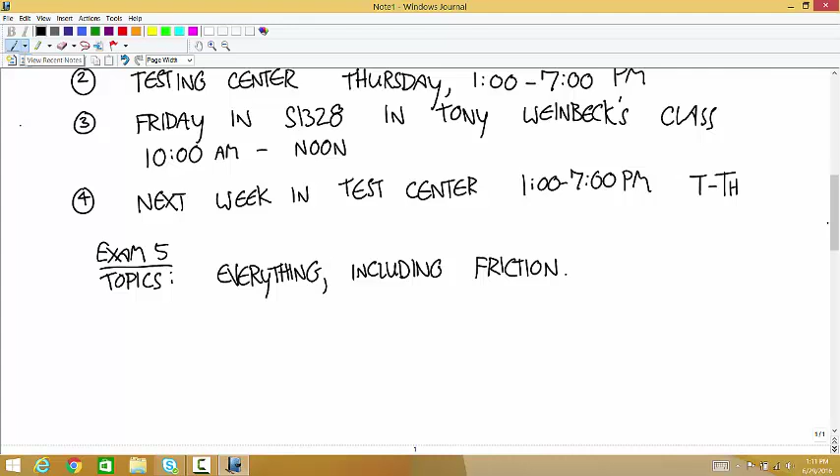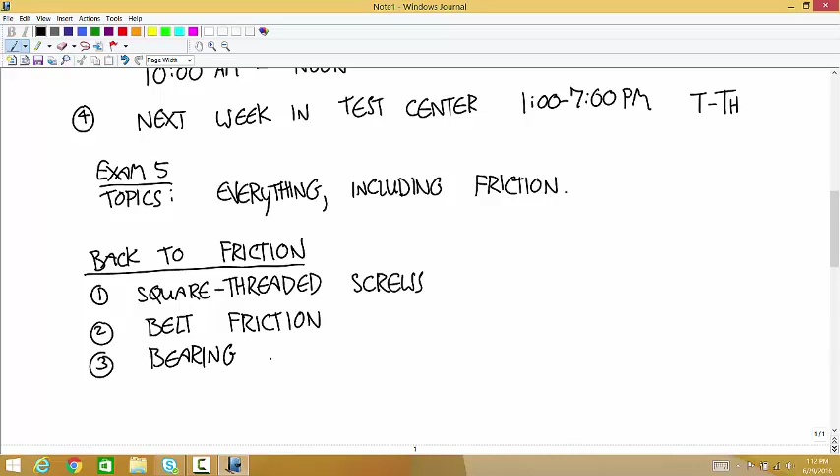Okay, so last time we talked about square threaded screws. So going back to friction, the topics are square threaded screws, belt friction, and bearing friction. And bearing friction is broken up into journal bearings and thrust bearings.

We're done with this one, so the next one is belt friction. Okay, so what's belt friction?

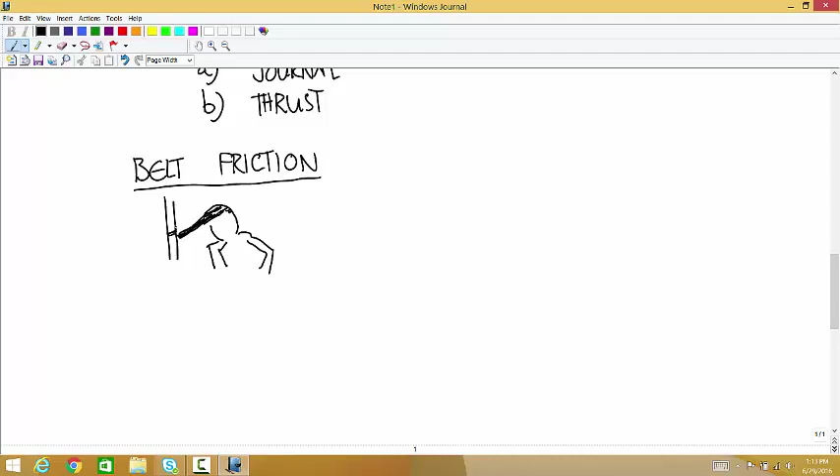You know how Rapunzel, when she's up in her tower... okay, here's Rapunzel, she's got really long hair. I don't know if you've heard of her before, but this prince wants to come up and play Nintendo or whatever. So she sends her hair down to let him come up, but obviously it would hurt a lot to just have someone hanging off your hair. He's not the thinnest guy. So she wraps her hair a whole bunch of times around this pole in her window and then drops it down, and then the prince can climb up. Okay, it still probably hurts.

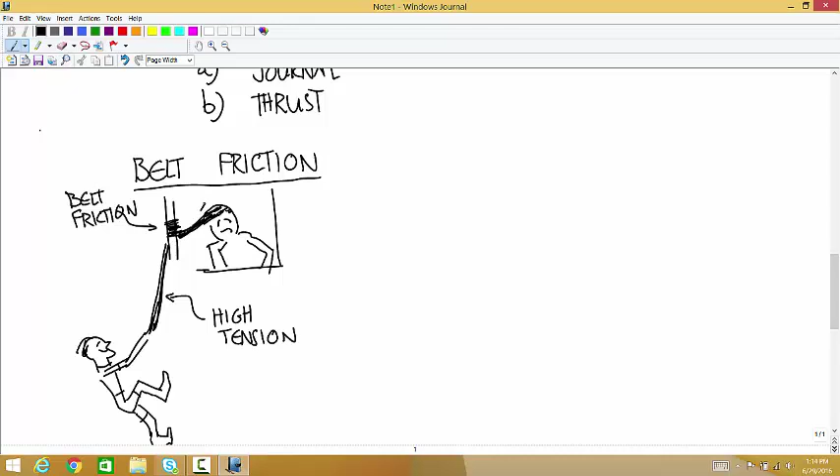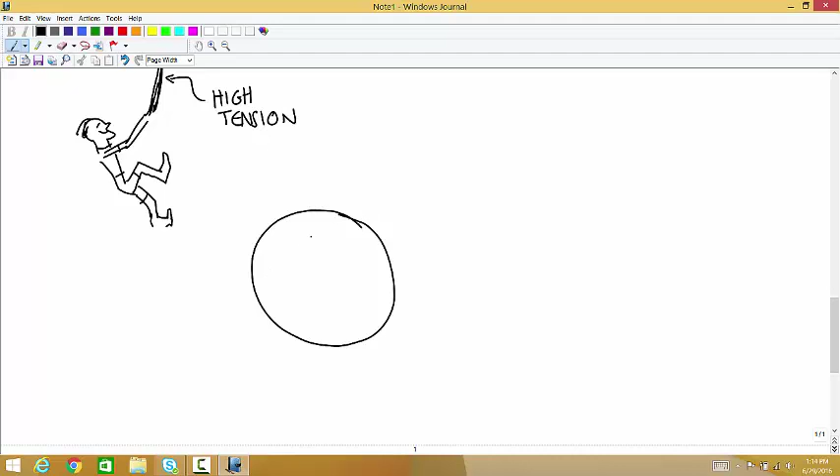Okay, so she's taking advantage of belt friction. If you wrap a cable around an object, there's a different tension on the two sides of where it's wrapped. There's a high tension on this side and a low tension on this side. And so for the calculation, we're always doing this with the cables wrapped around a circular object. So if this is the thing the belt or cable is wrapped around, here's one side of the cable, here's the other side of the cable. There's a T1 on one side and a T2 on the other side. We'll always assume this is the high tension, and this is the relatively lower tension.

And if you draw lines from the center of the object out to where the cables leave the object, you can think of the amount of wrapping that's being done as represented by this angle beta. This has to be in radians.

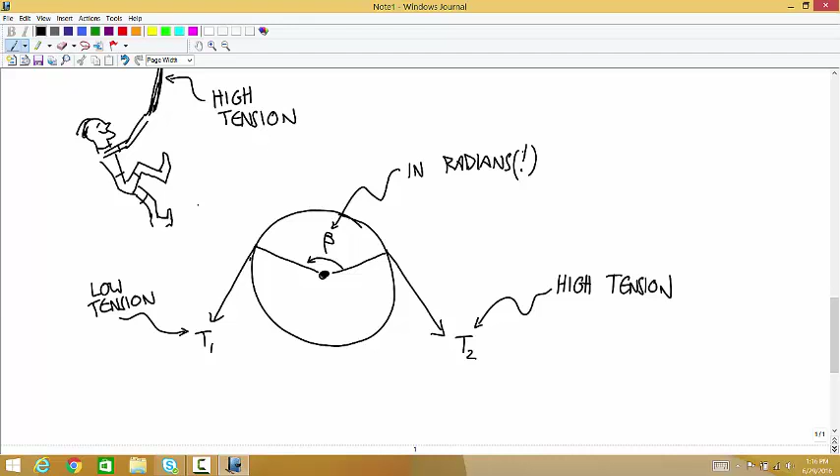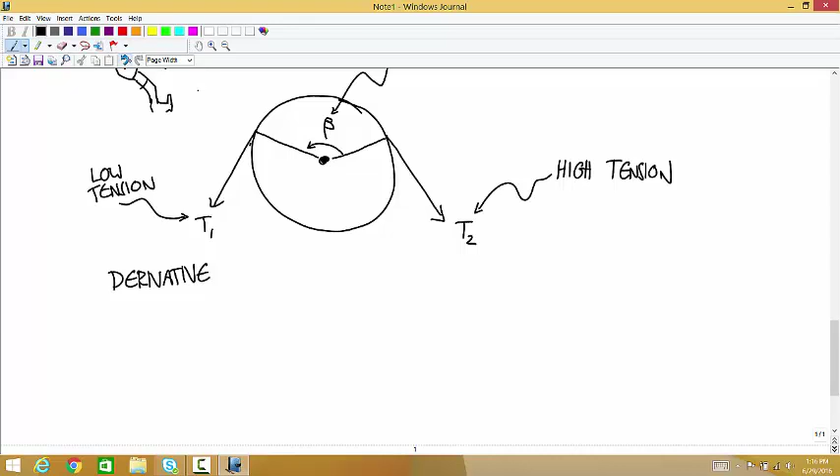I'm not going to go through the derivation, although it does follow a set of steps you see a lot in mechanics, but it's kind of tedious and takes a while. So I'm just going to try to show the thought process of the derivation. It uses the isolation of an infinitesimal piece of the cable.

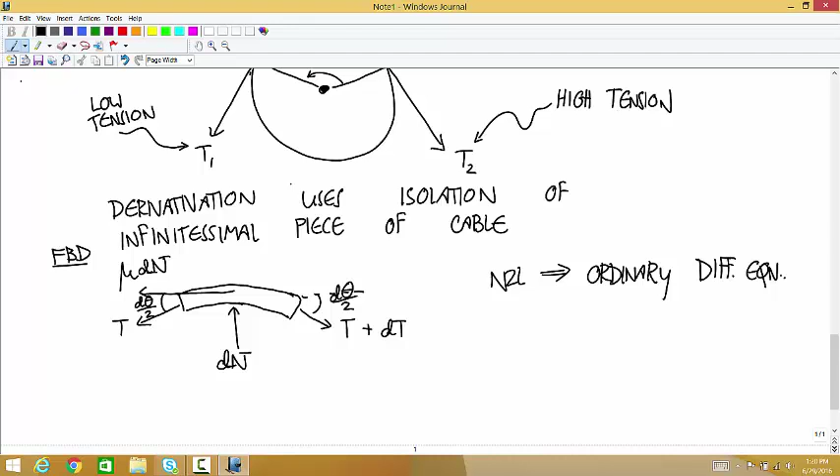And the solution to that ordinary differential equation is an exponential function. Any of you who've had classes where you talked about ordinary differential equations - exponentials are often a solution type. So it gives a solution that's an exponential, and that's not too surprising or unusual.

And so the final form is the ratio of T2 over T1 is equal to E to the power of the coefficient times that angle beta.

All right, so what are the ranges of possible values that this exponential can take? Well, what's the lower bound? It could not be wrapped at all, right, or touching at just a single point. In that case, what would beta be? Zero. And so you'd have e to the power of 0, which is 1. And that means that if that cable isn't wrapped at all over the object, T2 and T1 are the same.

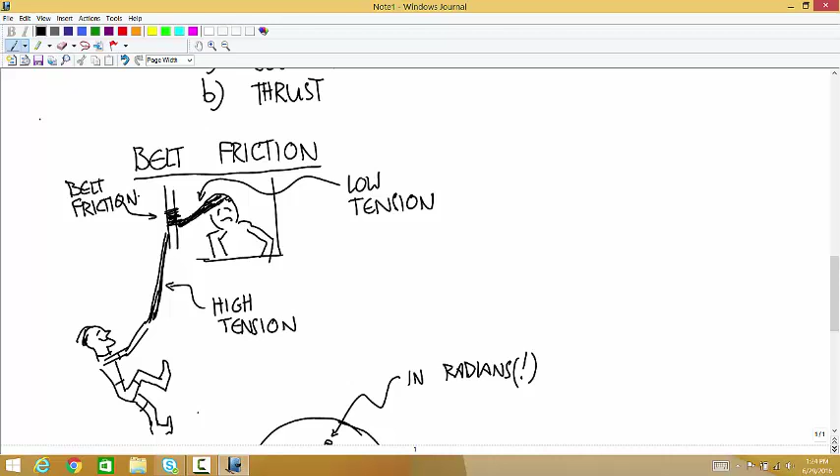Well, think about it as wrapping the cable around a pulley. What happens if you wrap this cable around a frictionless pulley 50 times? If there's a tension T on this side, what's the tension on the other side? It's T. It doesn't matter how many times you wrap it, because the pulley has no friction.

On the other hand, if this wasn't a pulley, if the belt was made of rubber and this was fixed so the pulley couldn't rotate, and rubber and metal have a high coefficient of friction, and you wrapped it around 50 times, and applied a tension T to this side, how much of that tension would be felt on the other side of the cable? Like none. That's the idea.

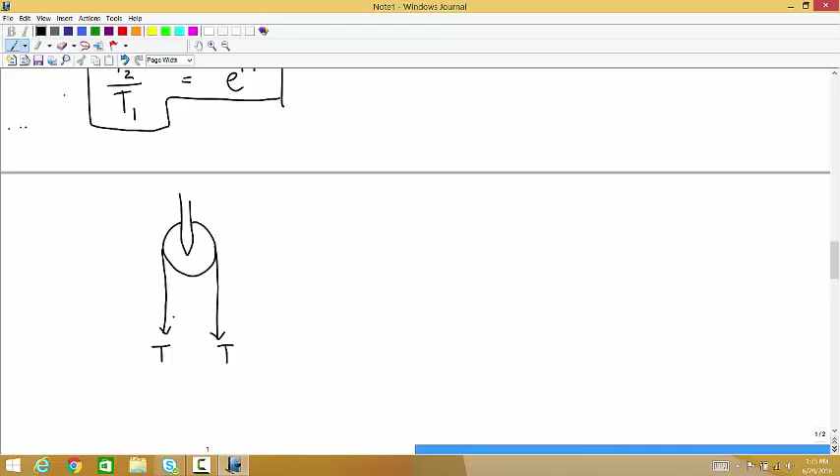Okay, so let's do an example. Any other questions?

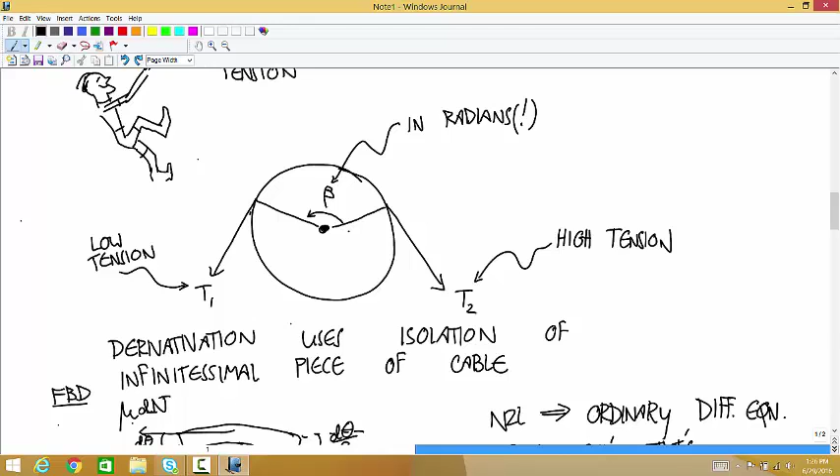According to the formula, beta has to be in radians, and it equals the number of times wrapped. In the drawing I did, it's not wrapped even once, so beta is just the angle between the two places where it leaves. But if it's wrapped a full time around, that's 2 pi. If wrapped a full time plus pi over 6, it's whatever that fraction adds up to. So if you wrapped it 3 full times, it wouldn't just be 0 — it would be 6 pi.

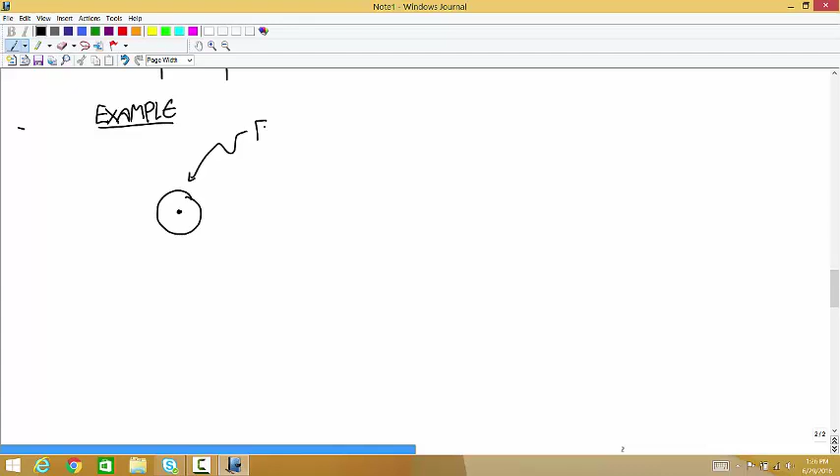Okay, so let's say this is the object. It's not a pulley, it's fixed — that's important, because if it were a pulley, none of this would have any effect. Let's say over here you have a 100 kilogram mass, and over here you're applying a force F. What F is required to maintain equilibrium if the cable just goes over the top and leaves on the other side?

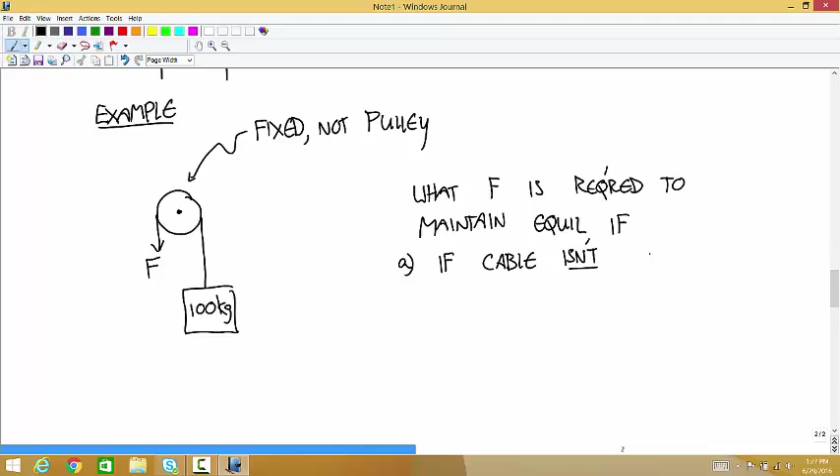So let's say the cable isn't wrapped multiple times. Second, what if the cable is wrapped 3 times before leaving the object in the configuration shown, before losing contact with the object?

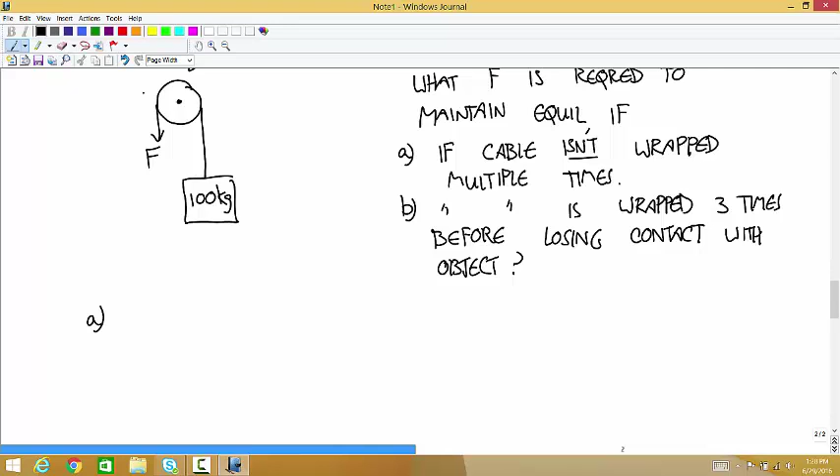Okay, so for part A, what would be the angle beta? Oh, and I need to give a coefficient of friction — let's say the coefficient of static friction is equal to 0.4.

So for part A, the cable is in contact starting at this point, all the way over the top until it gets to this point, and then it leaves. What's beta equal to? Pi. So T2 over T1 is equal to e to the power of 0.4 pi.

So we have T2 equal to 981 newtons. So 981 over T1 is equal to e to the 0.4 pi. So T1 is equal to 981 over e to the 0.4 pi. What do you get for that?

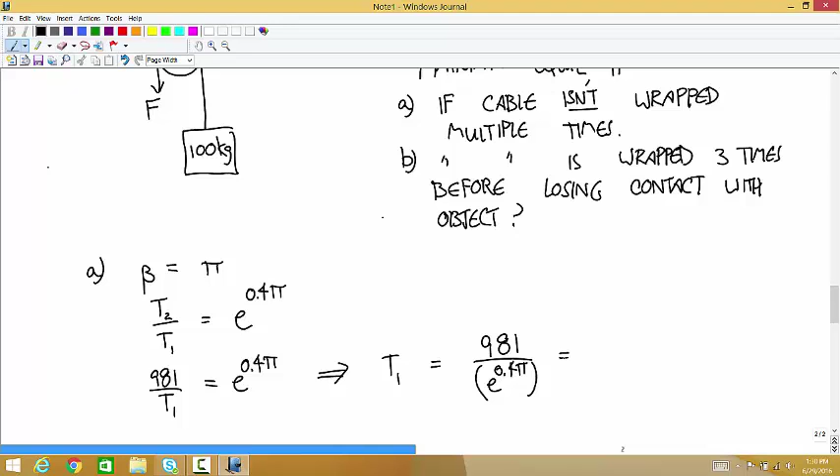I don't have that calculated — 0.4 is the coefficient of friction I gave. What is it? 279.2 newtons. Okay, so in order to support this 100 kilogram mass, it's a considerably smaller force you have to apply on the other side.

Now, what do we expect to happen if you wrap it 3 times around — is F going to get bigger or smaller? Smaller. What's beta equal to if you wrap it 3 times around and then it leaves? It's 6 pi for the 3 wraps, then you're back here, and 1 more pi to get over the other side. So beta is equal to 7 pi.

So 981 over T1 is equal to e to the power of 0.4 times 7 pi. So T1 is equal to 981 divided by e to the 2.8 pi. What do you get for that?

0.148 newtons. So it's tiny. Your question about whether there's a cutoff where there's basically no force—you'd probably say that we've already reached it by now.

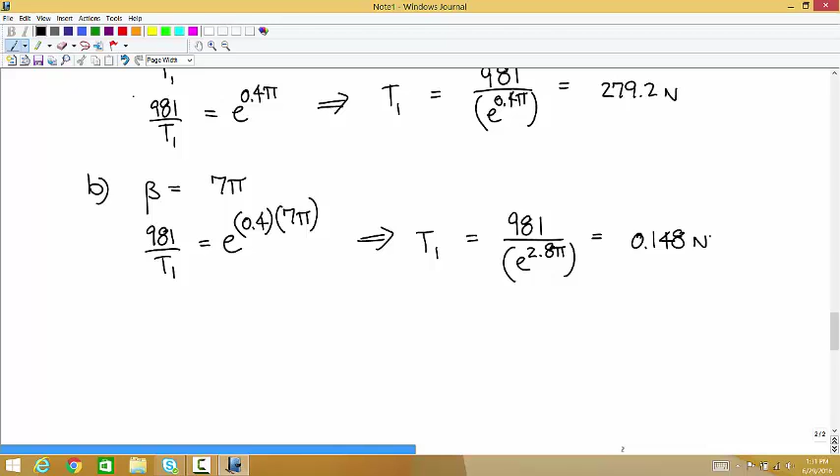Shouldn't it have a 6 pi instead of 7? It's because we went 2 pi, 4 pi, 6 pi, and then 1 more to get to the point where it leaves.

Question: why does T2 have to be the weight force rather than the other side's pulling force? Why does T2 have to be weight force?

T2 always has to be the bigger force. But how do you know F will always be smaller than the weight force? Well, there's always going to be one force that's required to keep it in equilibrium, and one that's a given force. In this case, the given force you're trying to keep in equilibrium comes from that 100 kilogram. You can think of this F as like a reaction force.

I have a quick question. Where did you get that 7 pi from? I understand if you go around the circle one time, you have 2 pi. Yep, so 3 times is 6 pi. And then, so where is that?

Okay, so 6 pi, this is where it touches the object, right? Then you go 6 pi, and you're back to this red dot. And then it's another 1 pi to get over here to where the cable leaves contact with the object.

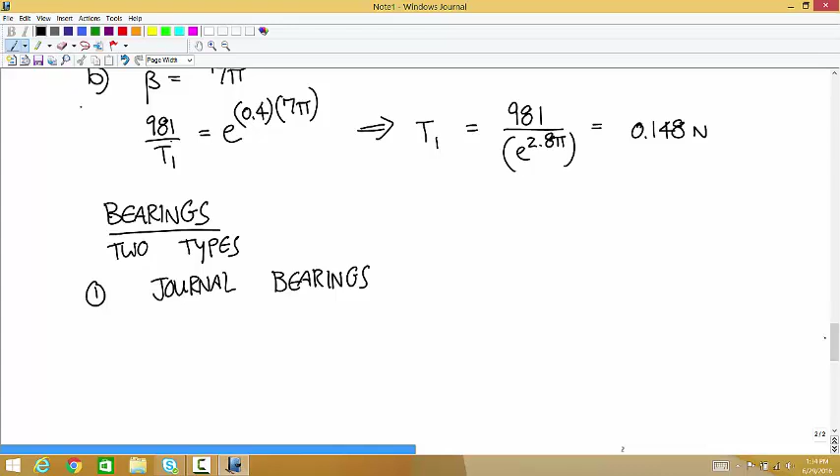Okay, so now bearings. There are 2 types that we're going to talk about. One is journal bearings. I think the easiest way to think about the difference between these two is what part of the joint, or what part of the two sides of the joint, are in contact with each other.

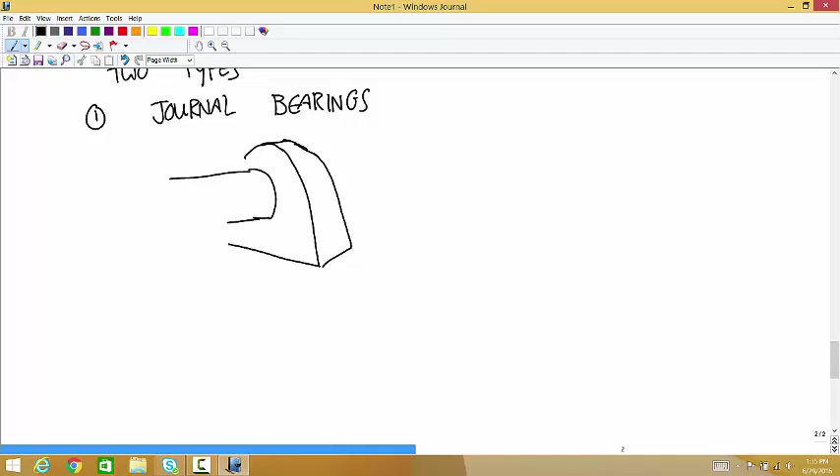A journal bearing is like the way I've been drawing pin joints. Okay, so if this object is rotating in this pin joint in this bearing, the surface that's in contact is like the underside of that pin in contact with the bottom of that hole. You see that? Somehow in my mind I thought I was going to be able to draw this more clearly than that.

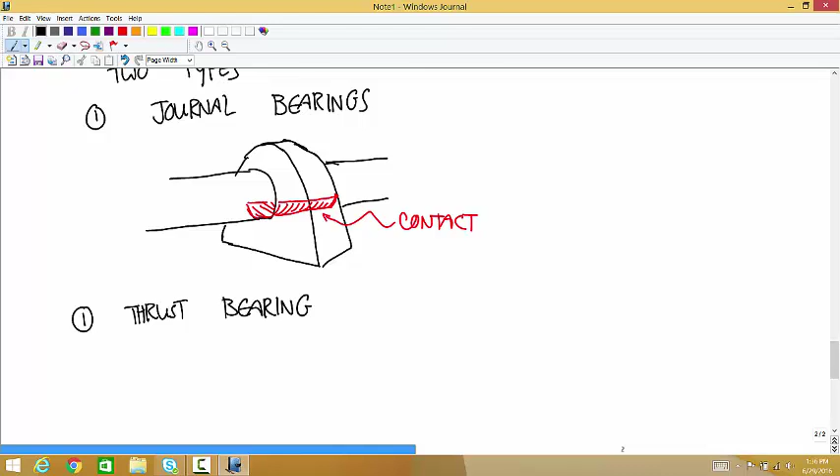Okay, so this is the place where it's in contact—that's a journal bearing. A thrust bearing is like you have this axle in contact with a wall or a floor or something, and the surface that's in contact is where the obscured side of that axle makes contact with the wall. It's called a thrust bearing, so this is the contact, because that friction comes from thrust applied this way.

Okay, so yes? This is like—it's like this, that's a thrust bearing, the friction rubbing like this. A journal bearing is like the friction in a motion like this. So it's kind of like when they connect shafts for drills or propellers—they're connected to another flat surface and then turning with thrust? That's right, yep, that's right. Like any kind of clutch. I assume that's like a clutch mechanism, right?

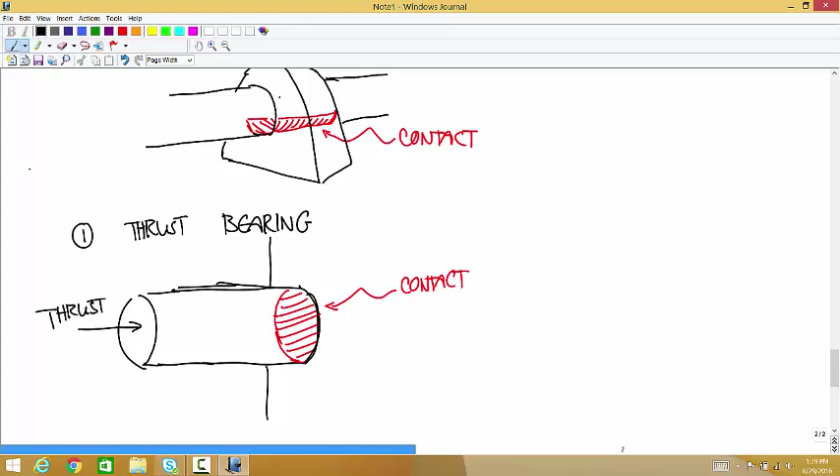And actually, that idea of going from a distributed load to a point where that force is applied is going to be key to understanding how this calculation works. It's a region, but you can always find a center of pressure—a point where that distributed load would act if it were a point that makes it an equipollent system. Yeah, right. Okay, so journal bearings.

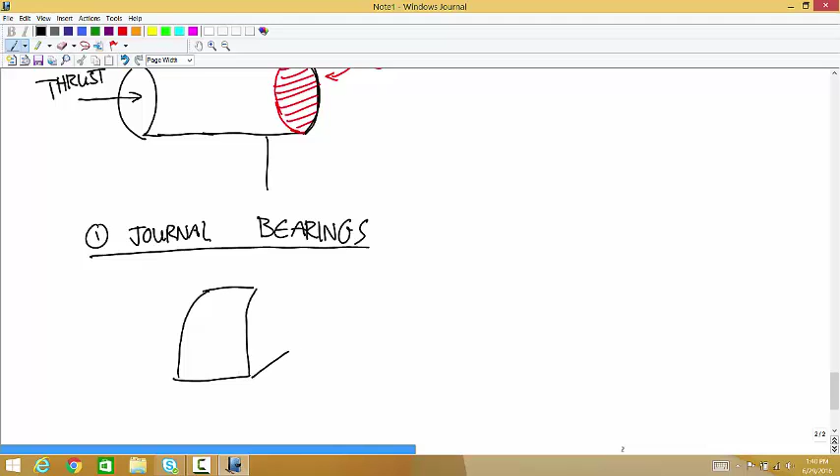So this is the bearing, and there's an axle extending on both sides. You can think of this as rotating this way. Let's say there's a weight applied to the axle, split over the two sides, so half of the weight is applied over here, and half over here. We'll think about observing it from the side.

And we're going to isolate the axle.

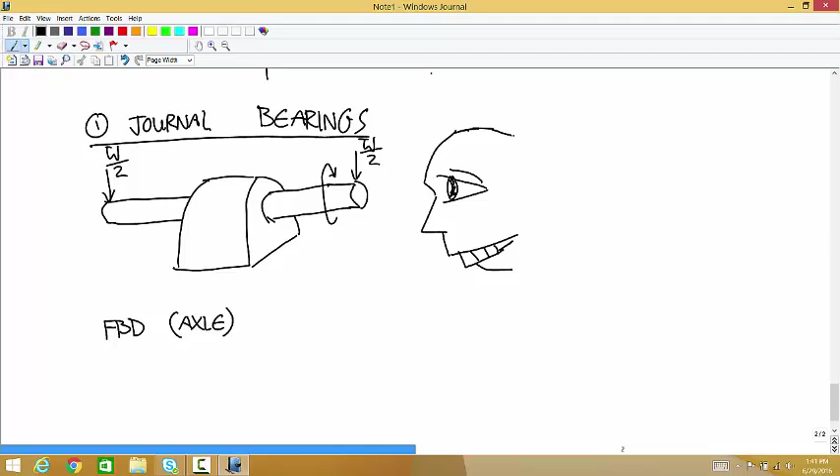Yeah. It's supposed to be like some dumb hillbilly hick. What's an axle? Like that. What's an axle? I took statics at Century. No, just kidding. All right.

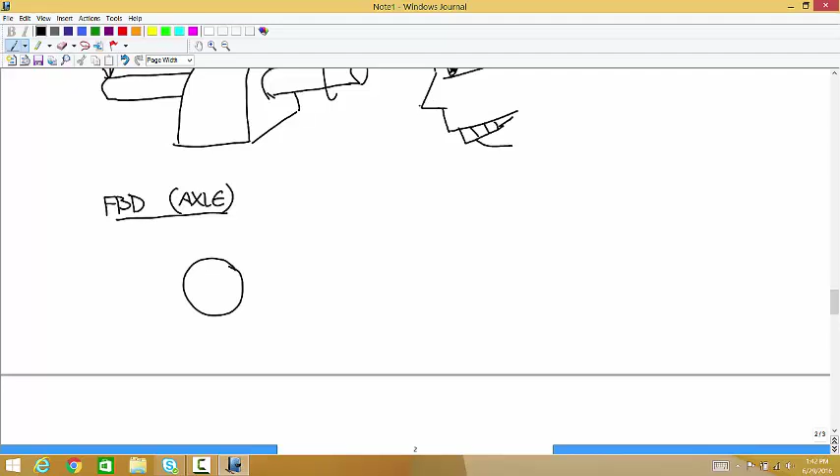So there's the axle, side view, like this guy sees. There's going to be a weight acting this way. And let's say that the thing is rotating this way. Okay, well, first of all, if this is in static equilibrium, there's going to be an equal

and opposite force acting from the bottom, right? There has to be, or else the center of mass would be accelerating. If there's no angular velocity, then that W would be acting right at the bottom. And like you said, there's actually a distributed load around the whole boundary. But if you found the center of pressure, the point where you could treat that distributed load as a point force, it would be acting right up from the bottom.

But now if we add an angular velocity, what you get if you measure that center of pressure is a W acting from the bottom in a place that's not right at the bottom. And because of that offset, if you think of this as a distance rho, in order to keep this rotating with a constant angular velocity, you need to apply a couple to this object that's equal to W times rho. This W times rho is a moment that friction is applying that's slowing this down, trying to stop it.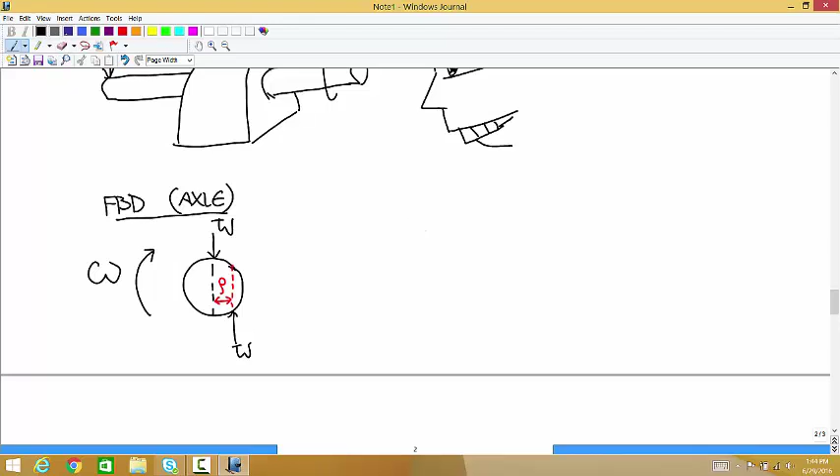Okay. Yes. So imagine, okay, so this is a complete free body diagram. Think of the rotational Newton's second law, and as the about point, let's take the center. There's no moment produced by the W from the top, because it's acting right through the about point. But there is a moment produced by the W from the bottom, and that's equal to, it has a moment arm of rho, a force of W, and it would cause a counterclockwise rotation in this case, so that's positive.

And so in order to keep this going with a constant angular velocity, if we're going to have no angular acceleration, we need to add some couple to it. So m is equal to negative W rho, and that's required to prevent an angular acceleration.

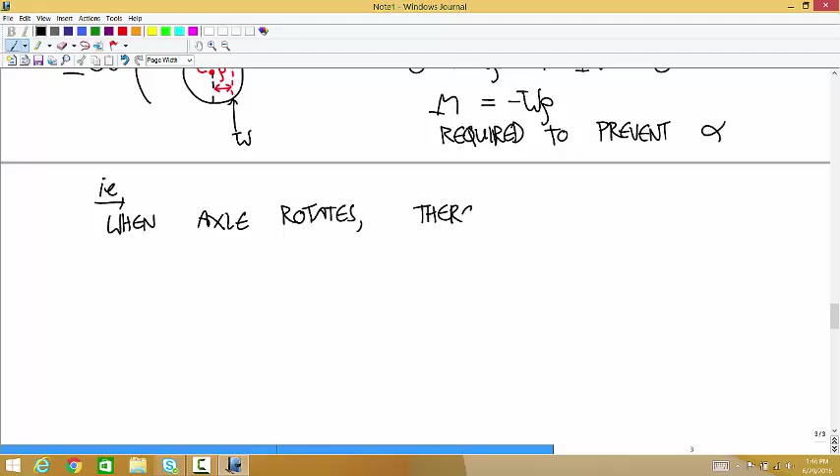So, in other words, when the axle's rotating, there's a moment of W times rho trying to slow down the rotation, stop the rotation of the axle.

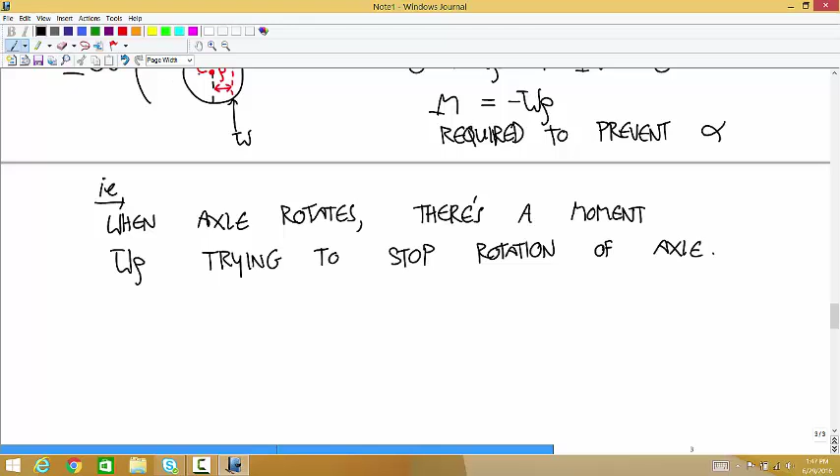Okay, so if we want to figure out the couple that we need to apply to keep this rotating with a constant angular velocity, we need to come up with an expression for rho in terms of coefficients of friction, that kind of thing. Can you maybe just quickly go over the different W's on that diagram?

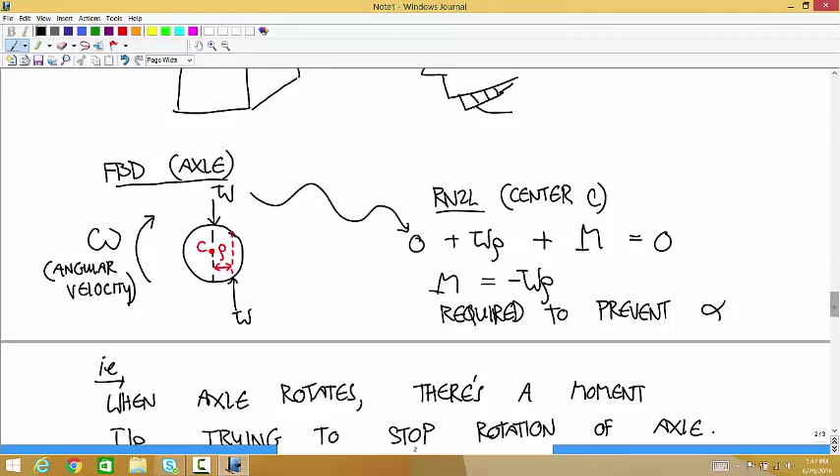Because there's one that's kind of rotating. So that W is the weight. Yes. This omega is the angular velocity, so that's just saying that it's rotating. The W on the bottom is the friction... the same as the W on the top. We know that whatever weight's applied to the top of the axle, the bearing is applying to the bottom of the axle. It's like a normal force. Right. But the fact that it's offset from the center is why we have this moment that's trying to slow the rotation down.

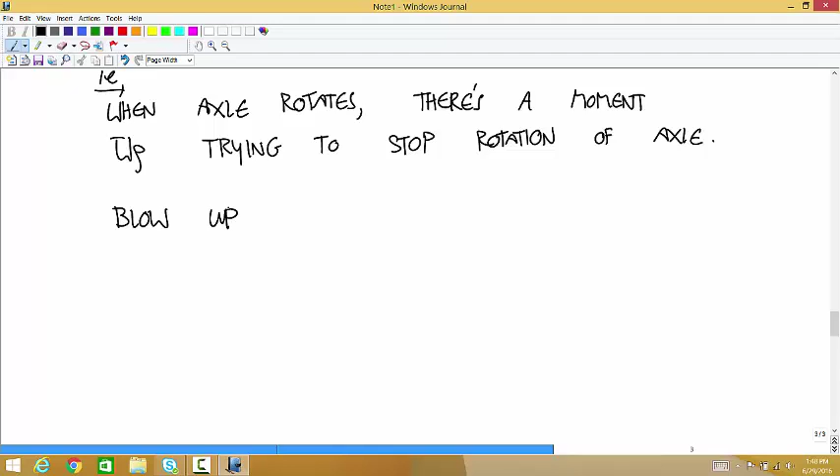Okay, so any other questions? So let me zoom in on the axle, and let's think about what we know. Okay, so there's the axle, there's the center. We have W acting down. We have W acting up somewhere over here. And actually, I'm going to make that a little longer. Okay, so that's W.

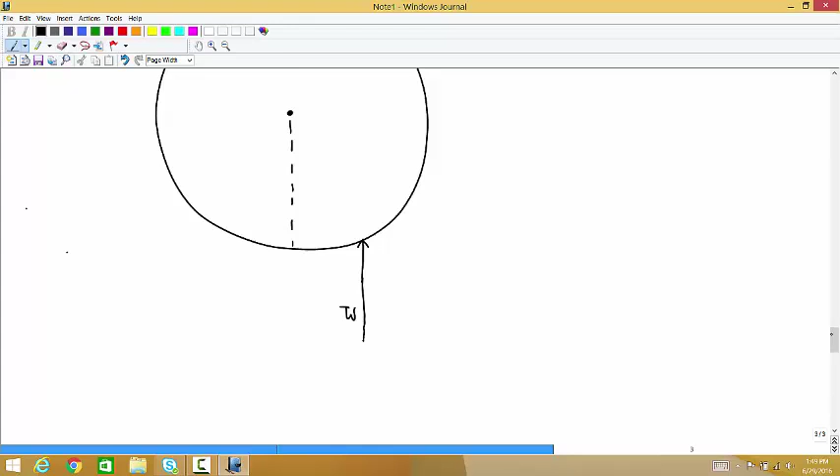And if we knew the angle between where W is acting and that line from the center, if we knew that angle theta, we could figure out what the moment is, because this is the rho that we want. This distance is the radius of the axle, which is easy to measure. Why is that just friction force, the W? Yeah, that's the next thing we're going to do, is we're going to break up that W into a normal force and a friction force.

Okay, so notice now that this W, that's a contact force. And so you can break up that contact force into a normal and a friction, where these two are perpendicular. This is the normal force. And the friction force is equal to the coefficient of friction times the normal.

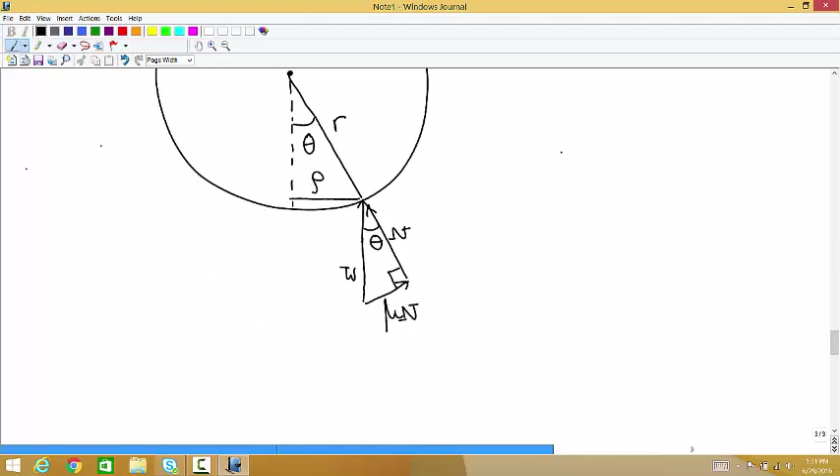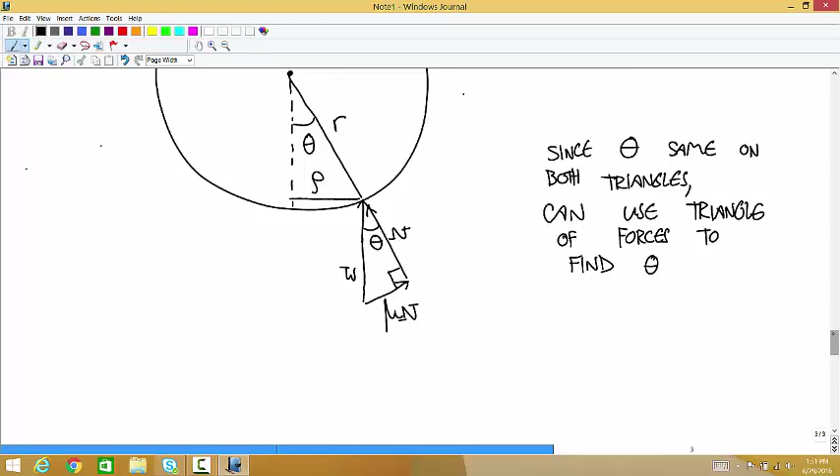So since those thetas are the same, we can use that, I'll call this the load triangle or the force triangle. Use the triangle of forces to find that angle theta. This triangle here, we don't have any need for any of that stuff except that this is going to let us solve that angle theta.

Yeah, I'm just clearing up what you mean by the triangle of forces. Oh yeah, so I know what you mean, this one.

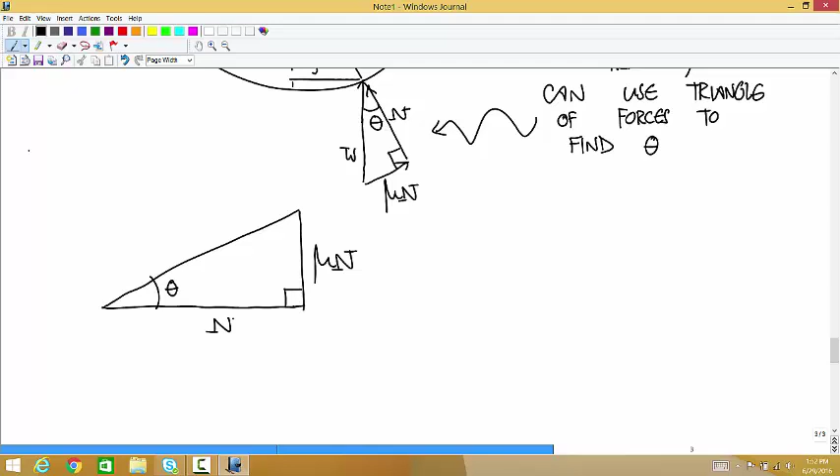Okay, so let me draw it down here. So this is the angle theta. That's 90 degrees. This is mu N. This is n. And so theta is equal to the inverse tangent of mu n over n. And those n's cancel, so theta is just equal to the inverse tangent of mu.

Would you typically know the normal force exactly? No, but you don't even need to. What you know is that W, they just need to weigh, and then you can figure it out. The normal canceled out anyways. So you know that coefficient of friction and you know the weight. So you just need the coefficient of friction. That's right, that's all you need. Yep, because they cancel out here.

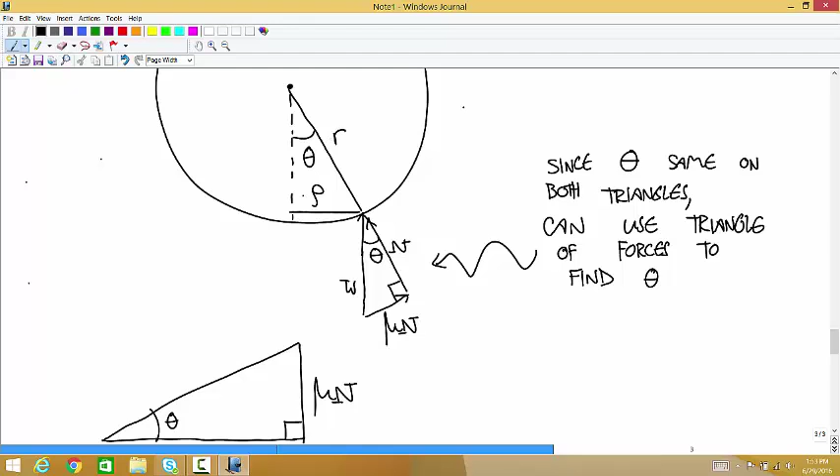So what do you need the rho vector for? Okay, so the rho vector, now that we have this theta, the moment that you need to keep this rotating is equal to rho times W. And rho is equal to r times the sine of theta from that other triangle. So r times sine theta times W, you can rewrite that as r times the sine of the inverse tangent of mu times W.

And what's the sine of the inverse tangent of mu? So this is a correct answer. This tells us the moment. But we can simplify this a little bit if we want. And in engineering, it's not really that necessary to simplify stuff. But we can simplify the expression for m.

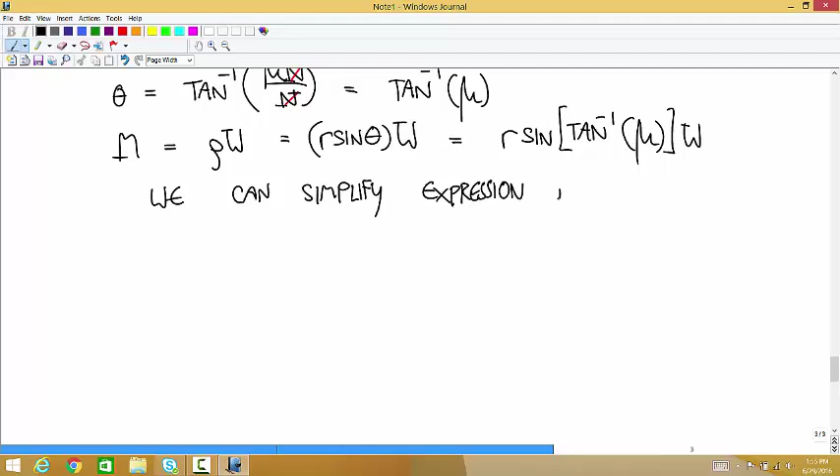If we think of a triangle with an angle theta that has a tangent that's equal to mu. Okay, so the simplest triangle that you can have that has a tangent equal to mu, since tangent is opposite over adjacent, has mu over here, and 1 over here. And then, so what's the hypotenuse of this right triangle? It's the square root of 1 plus mu squared.

Okay, so then what's the sine of theta? It's mu over the square root of 1 plus mu squared. And so the final answer is that m is equal to mu times r times w over the square root of 1 plus mu squared. So that's the moment required to keep the axle rotating with a constant angular velocity.

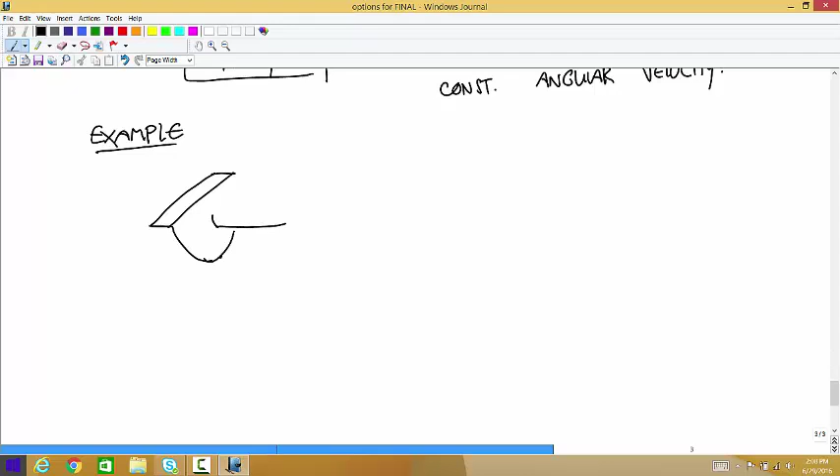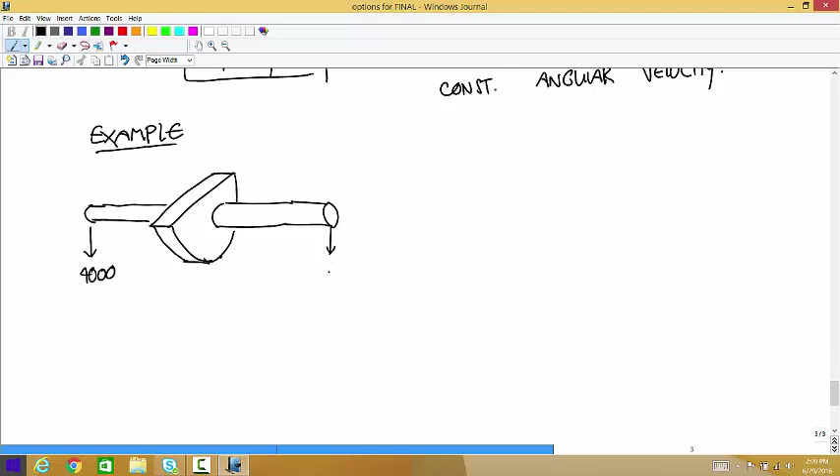Okay, so let's say that we have a 4,000 Newton load there, a 4,000 Newton load there, an 8,000 Newton load there. The radius of this axle is 0.03 meters, so if you used calipers to measure the diameter of this, that would be 6 centimeters. And the question is, what's the couple M that must be applied to this axle to maintain constant angular velocity?

And let's say that these surfaces have a static coefficient of friction of 0.05 and a kinetic coefficient of friction of 0.02.

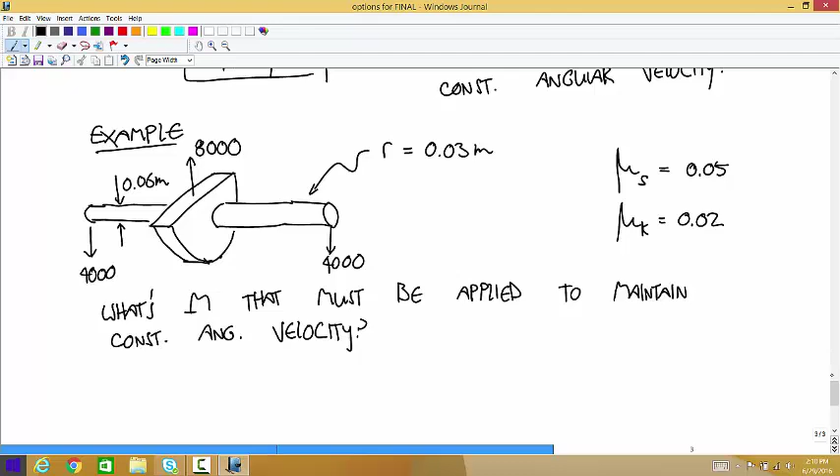Okay, so we'll go to that free body diagram. This problem is happening upside down. How's that going to affect this problem? Not in the least—you can still draw it however you want. We're just looking for scalar values, not worried about directions.

But once we calculate this moment M, what direction would you have to apply that couple to keep it rotating with a constant angular velocity? You have to apply it in the same direction that it's rolling, because that friction is trying to slow it down.

So we have a force of 8,000 acting down. Those are the two 4,000 Newton forces that in the drawing are really acting in the other direction, but we don't care. And then over here we have the normal force and the friction force, and those add up to 8,000 here. This is N.

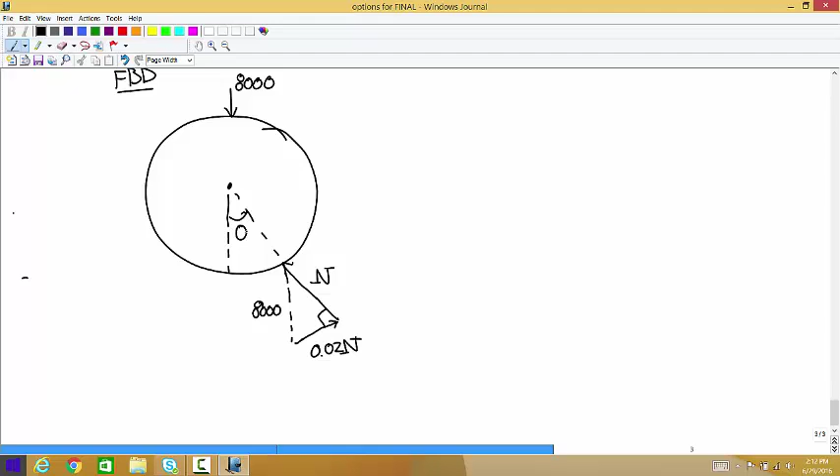And so we're trying to find this angle theta, same as this one. So this is 0.02 N, this is N. Theta is equal to the inverse tangent of 0.02 N over N. Cancel the N's, and you get inverse tangent of 0.02. If you want to calculate that numerically, you get an angle of about 1.15 degrees.

So in my picture, it's way exaggerated. Where did you get 0.02 from? That's the coefficient of kinetic friction that I gave.

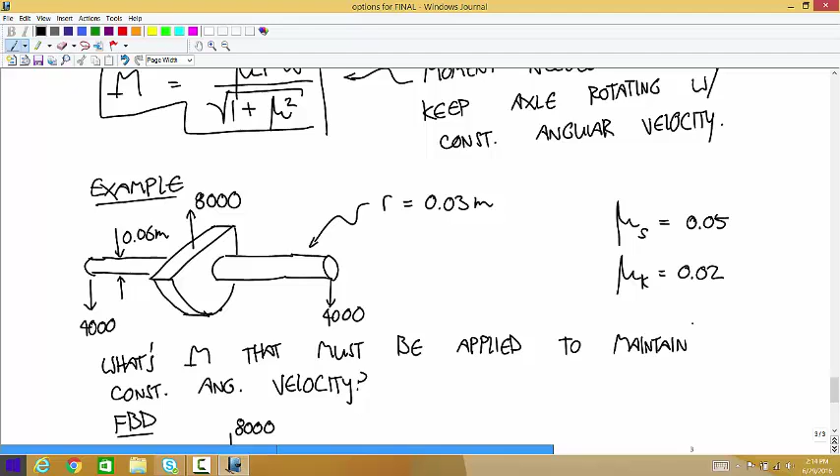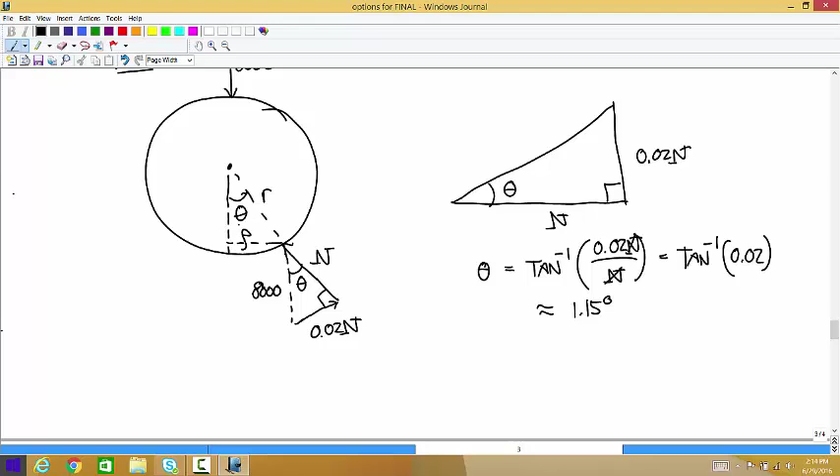So rho is equal to—this is rho, this is r—so rho is equal to r times the sine of theta, which is 0.03 times the sine of 1.15 degrees, or 6.0 times 10 to the minus 4th meters. Then the moment is equal to rho times the weight, which is 6.0 times 10 to the minus 4th times 8,000, and you get about 4.8 Newton meters.

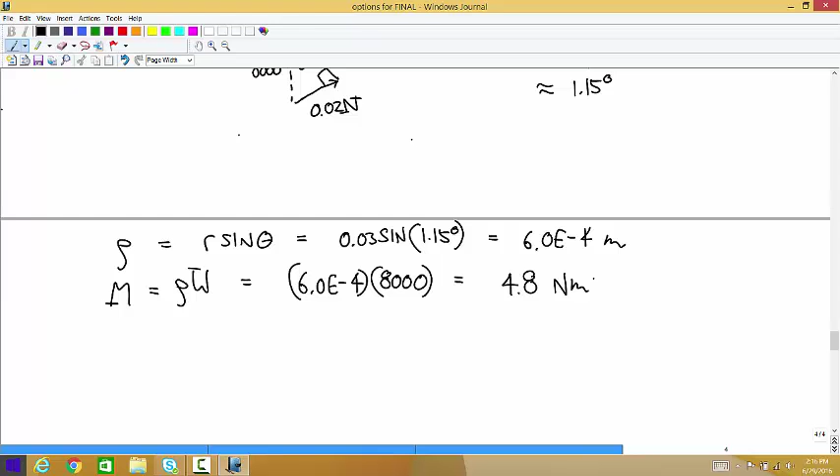And the reason it's 8,000 is because that's keeping it at equilibrium, so the weight has to match. If you look at that original picture, there's 8,000 newtons applied down to the axle and 8,000 newtons applied up to the axle. So is that the 4,000 on both ends, or is it that 8,000? Yeah, both of those two 4,000s add up to the 8,000 down, and then there's also an 8,000 up.

So are you saying you can put either of those? Either 8,000 you can put, or the two 4,000s equal the offset. Yeah, we really drew this upside down from what's happening, but you just have to figure out—just add up all the forces acting on the axle itself, and that's W.

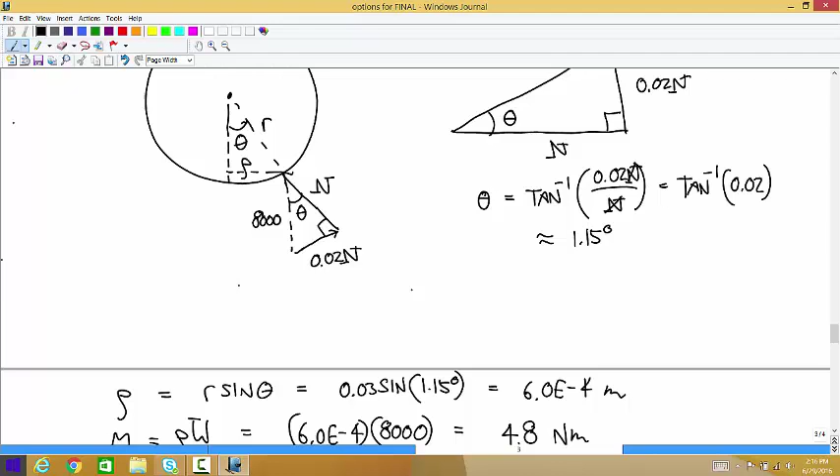Okay, this is something I didn't say explicitly yet, but what kind of lubrication works here? We're talking about very small coefficients of friction, a very small moment to keep this rolling, which is good, because otherwise it's damaging your axle all the time. So obviously there's some kind of lubrication. What kind of lubrication works for these calculations?

That was not the answer I was going to give. Remember that all of these calculations are based on treating friction like it's equal to the coefficient times the normal force, and that only applies for dry friction. So this is not applicable to cases where you have wet lubrication, like oil—this is only applicable to dry lubes like graphite. You'd have to use a different approach if this is using a large amount of oil, because with a liquid, that friction force is proportional to the velocity, not proportional to the normal force. So all of this friction stuff applies for dry lubes only.

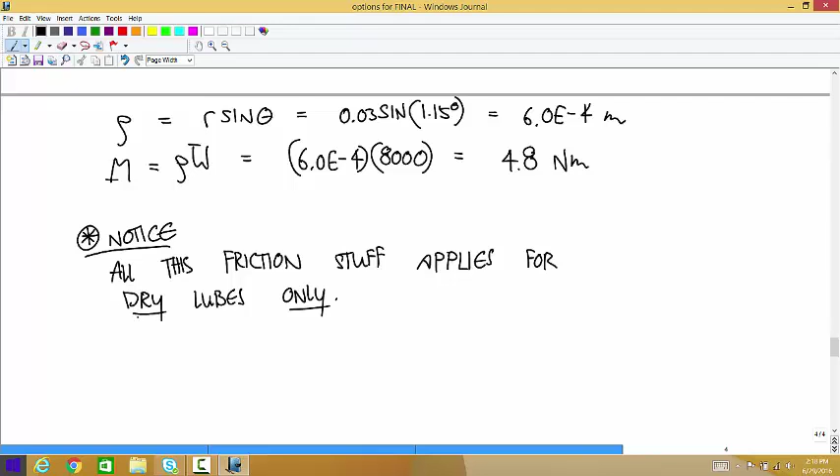Okay, so now let's do the last kind: thrust-bearing friction. Let's do this for a more general case—I'm going to do this calculation for a hollow tube. There's a total force P applied that's pushing this hollow tube into the ground, and this tube is rotating. There's a friction force between the contact at the ground with the bottom edge, or the bottom surface of this cylinder. So what's the couple that's needed to keep this rotating with a constant angular velocity?

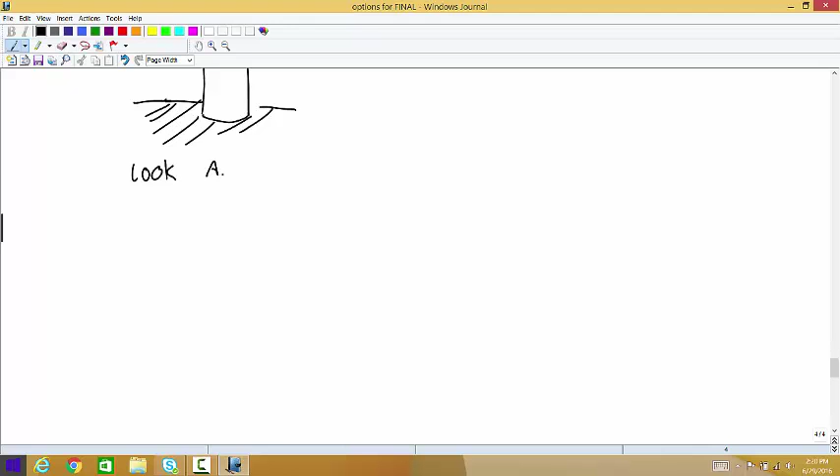Okay, so we're going to look at that surface of contact. There's the outer radius, there's the inner radius. I'll call this capital R inner, and I'll call this capital R outer.

And we're trying to figure out, so as this thing rotates around, every point in contact is going to have an associated normal force. Well, it's actually going to be an infinitesimal increment of normal force. And because of that normal force, it's going to have an associated friction force. And that friction force is going to produce a moment. That's where the moment's going to come from.

The problem is that each one of these points has a certain normal force, a dN, an infinitesimal normal force. But based on the moment arm between these and the center of the cylinder, the friction force corresponding to each one of these normal forces is going to produce a different increment of moment. So we need a way to do this as an integral problem.

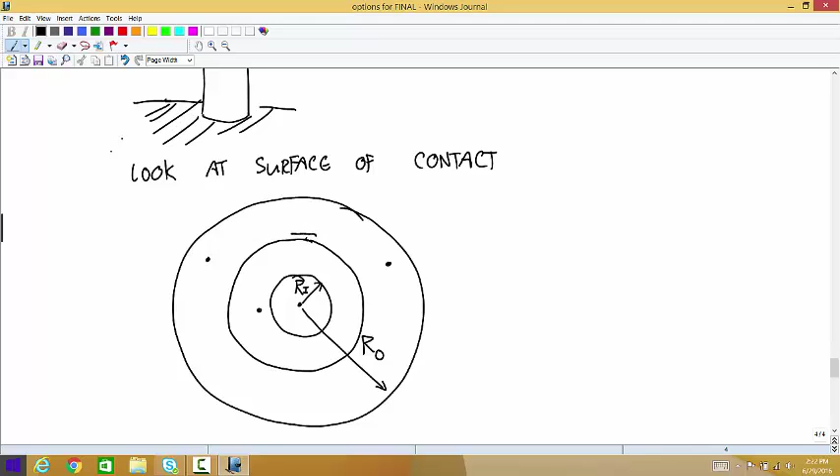So we're going to choose an increment, an infinitesimal area of contact. This has a thickness of dr. And from the center out to this thing, we'll call that lowercase r. We're going to figure out what the moment applied by all the friction on this infinitesimal ring is, and then we're going to integrate over the whole surface.

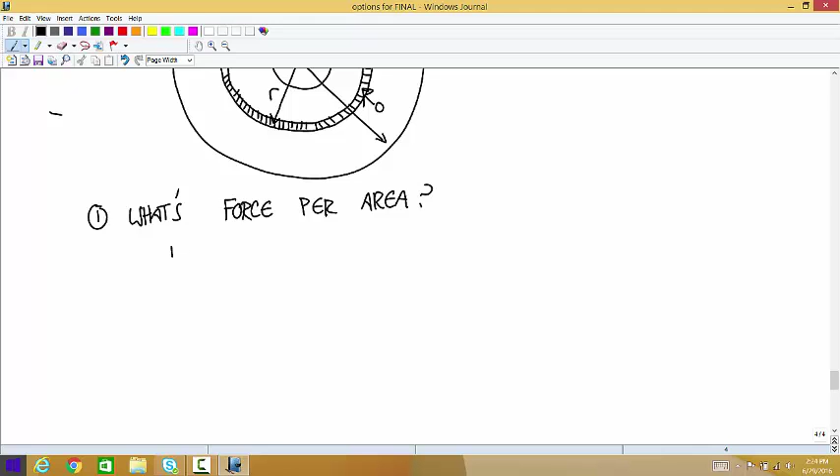Okay, so step one. First we want to figure out what's the force per area. To do that, we're going to take that total force P. So force per area is equal to P divided by the area of contact. The surface area of contact is pi times R outer squared minus R inner squared.

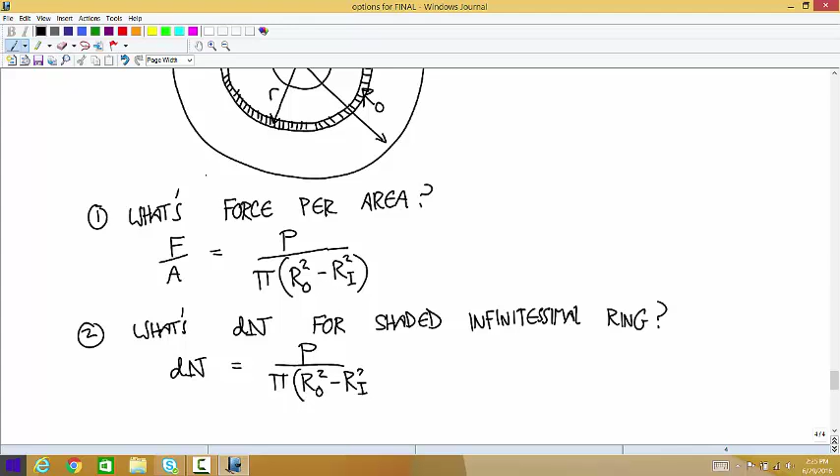Now we're going to figure out what the total normal force is for one of our little infinitesimal rings. So what's the increment of normal force for one shaded infinitesimal ring? Well, if this is the force per area, then dN is just going to be equal to this times the area in that infinitesimal ring. So dN is equal to P over pi times the quantity R outer squared minus R inner squared, times the area of this ring, which is the circumference times dr. So this is times 2 pi R dr.

We can cancel those pi's, and we get 2P R dr over R outer squared minus R inner squared.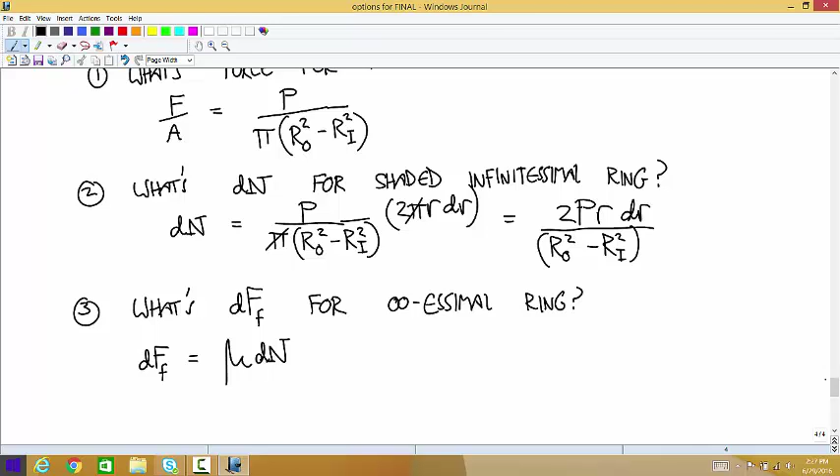Now that's the total normal force applied on that infinitesimal ring. Now we want to use that to figure out what the total friction force is applied on that infinitesimal ring. So I'll call that dF, force of friction. dF is just equal to the coefficient times dN. We're eventually going to integrate over R, so eventually it's going to go away when we integrate. But for now, that dr just represents the infinitesimal thickness of this ring. So the total area of this ring is the circumference times the thickness. You can think of unclipping that ring at one point and straightening it out into a long rectangle.

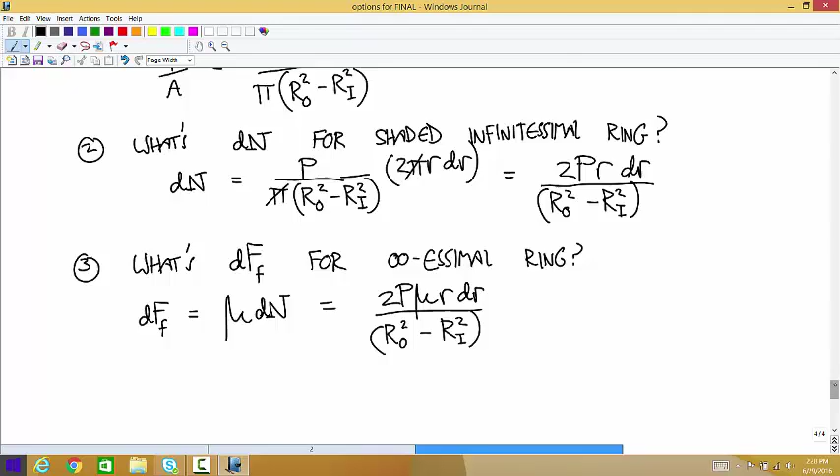Okay, so now we're just multiplying on the coefficient, so this is equal to 2P mu R dr over R outer squared minus R inner squared. And then the last thing we have to do is figure out, well, there's really two more steps. The last step is we're going to integrate. But for this ring, now we're going to figure out what's the increment of moment that's applied by the friction on that ring.

So what's dM for this ring? dM is just equal to R times the force of friction. And so that's equal to 2P mu R squared dr over R outer squared minus R inner squared.

That's for one of those infinitesimal rings, so now we just have to integrate to get the total moment. So the total moment is equal to the integral from R inner to R outer of R dF — just write it as dM. Okay, so I'm going to pull out all the constants. So out here we have 2P mu over the quantity R outer squared minus R inner squared, times the integral R squared dr, integrated from R inner to R outer.

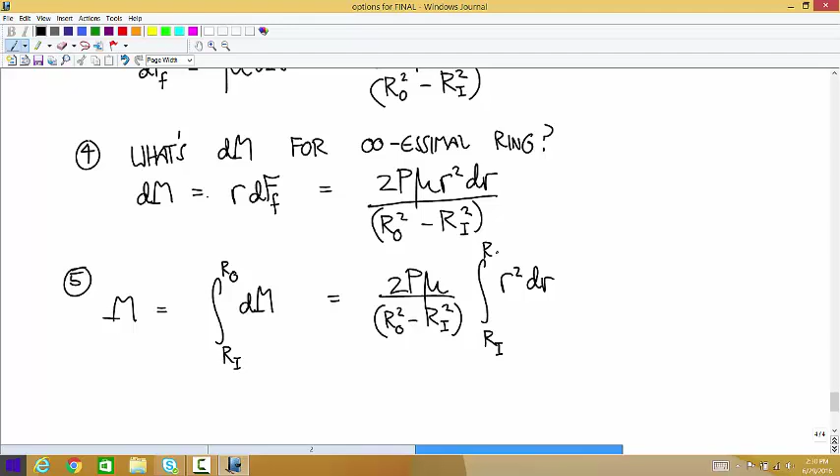And so you get 2P mu over, when we integrate this, we're going to get R cubed over 3, so I'm going to pull the 3 out here. And then when we evaluate this integral, we're going to get R outer cubed minus R inner cubed. And that is as simple as you can make it. It's a little surprising, it looks like maybe you could factor stuff there, but you can't.

Any questions about that thought process? Yep. What equations are going to be given on the exam?

I'm not really giving much, I'll give that belt friction one, but the other ones you need to be able to go through this derivation. You can do it with numbers, so you're not going to have to do it algebraically, but you need to be able to follow that thought process.

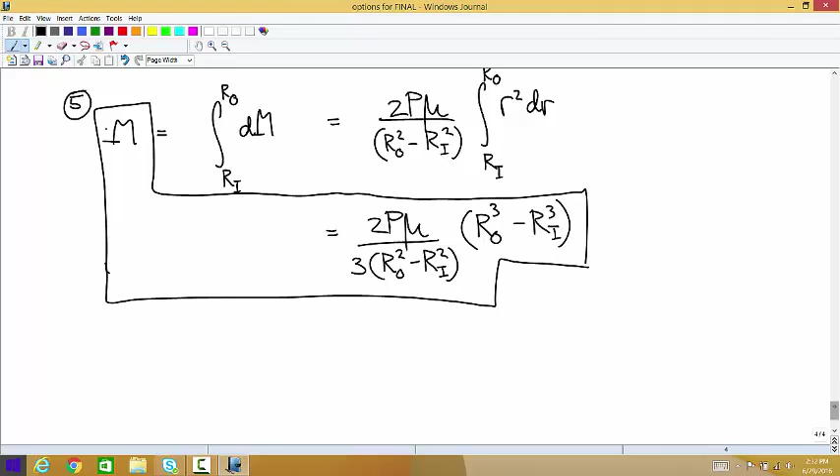Okay, let me do an example. So let's say that we have a solid cylinder. There's a 10,000 Newton force pushing down. The radius of this cylinder is 0.1 meters. And let's say that this is at rest.

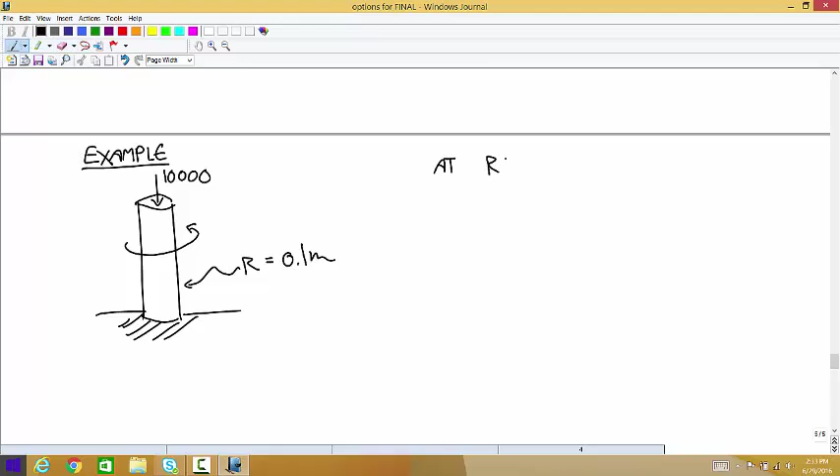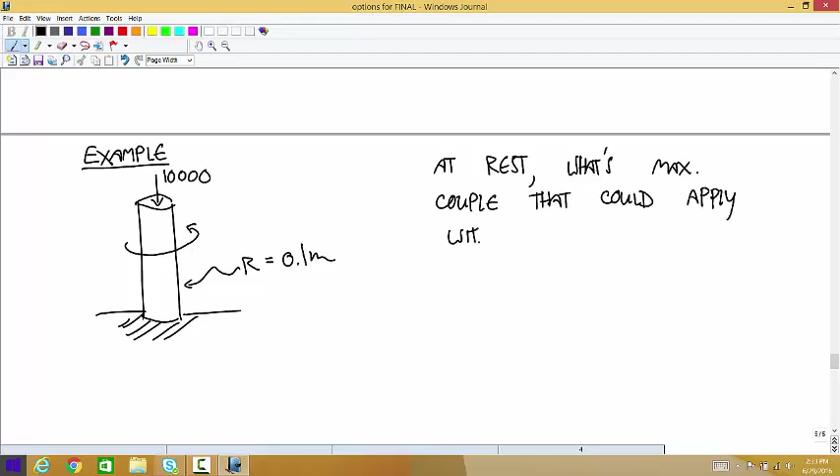What's the maximum couple that you could apply without initiating rotation? So let's say that the static coefficient of friction is 0.1 and the kinetic coefficient of friction is 0.06.

Okay, so we're going to be looking at a ring like this, with a thickness that's equal to dr, and a radius that's equal to r. And the distance to the outer edge is 0.1.

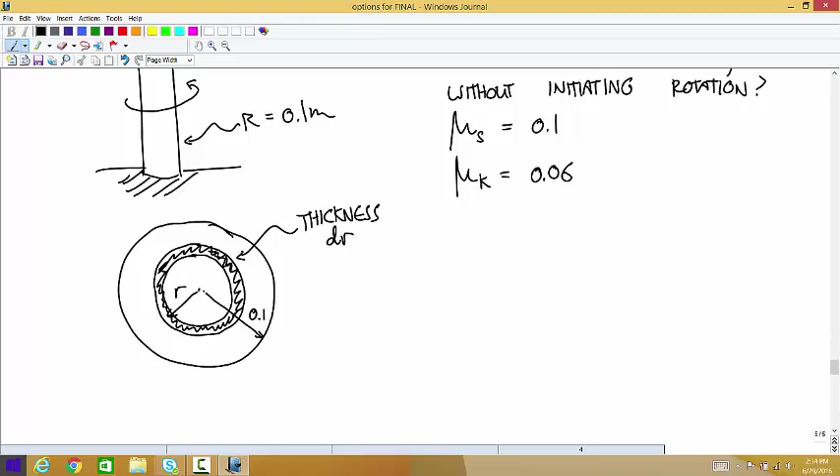Okay, so what's the first step? Yep, so first we want to figure out the force per area. So that's equal to 10,000 divided by 0.01 pi, and I'm going to keep that pi in there because there's going to be another pi coming up that'll cancel it. But if you want to just calculate that numerically, that's fine with me. So what does this give you? 1 times 10 to the 6 over pi, I think.

What's the second step? Yep. So dn is equal to 1 times 10 to the 6 over pi times the area, which is 2 pi r dr. And so the pi's cancel, and you get 1 times 10 to the 6, and there's that 2. So 2 times 10 to the 6 r dr.

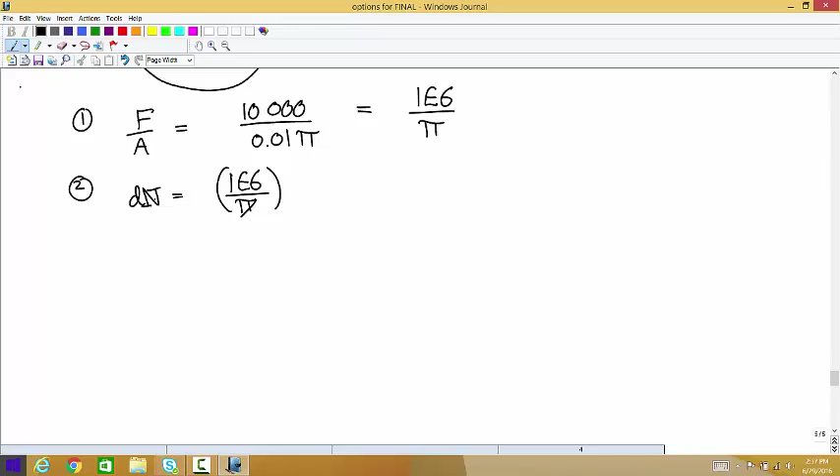Wait. That's that times, oh yeah, I made a mistake here. So we're trying to figure out the total normal force acting on that infinitesimal ring. And that infinitesimal ring doesn't have the radius of 0.1, it has a radius of r. This has to be true for any general infinitesimal ring. So we have the force per area times 2 pi r dr. And so we get 2 times 10 to the 6 r dr.

What's the next step? Friction. So dff is equal to mu times dn. Which coefficient do we want? Static, because this is at rest, and we're trying to find the boundary before rotation is initiated. So that was 0.1, right? Static coefficient of friction was 0.1. So this is equal to 0.1 times 2 times 10 to the 6 r dr, or 2 times 10 to the 5th r dr.

What's the next step? dm, yeah. So dm is equal to r times dff. And so that's equal to 2 times 10 to the 5th r squared dr.

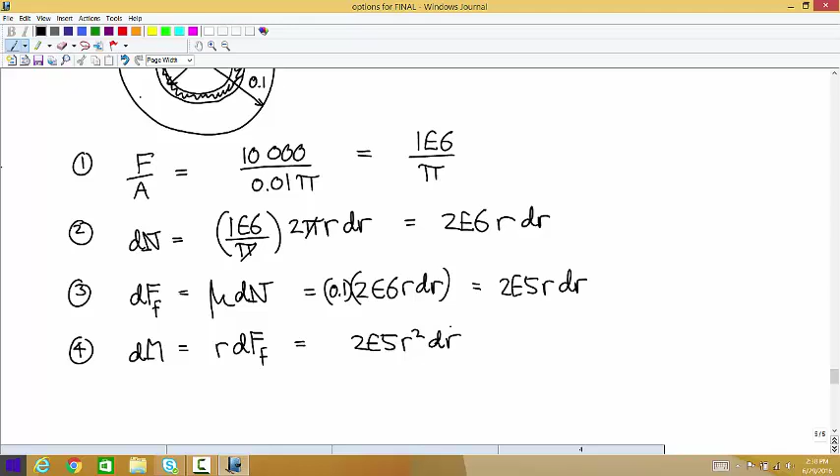And then the last step is just to integrate this over all the values of r. So m is equal to the integral from 0 to 0.1 of dm. So that's equal to 2 times 10 to the 5th times the integral from 0 to 0.1 of r squared dr. So 2 times 10 to the 5th times r cubed over 3 evaluated from 0 to 0.1, and I think you get about 40.

Is that what you got? 40 Newton meters. Maybe I used a different number. Oh yeah, that's wrong. What do you get if you... Like 67? Okay, 66.7 Newton meters. 40 was if it was rotating and we were trying to figure out what it took to keep it in constant angular velocity.